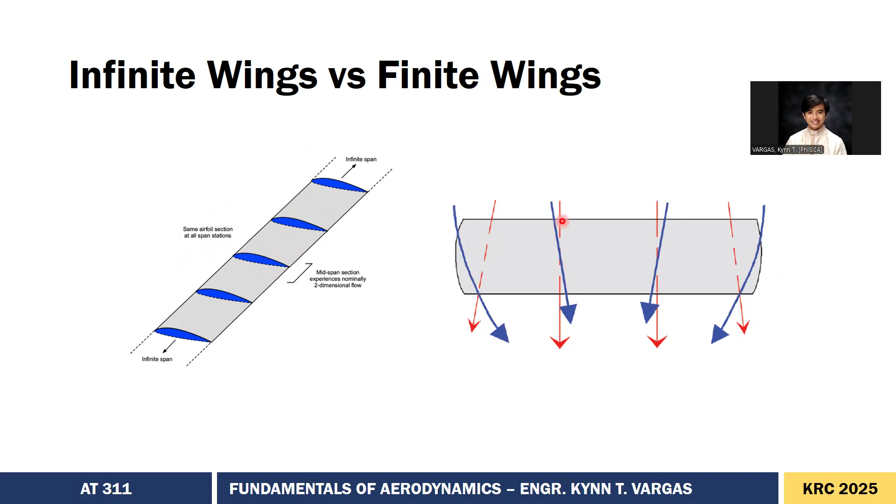So for infinite wings, this is what I mentioned earlier. It covers the end-to-end of the wind tunnel test section and varies in the x and y direction only, unlike finite wings where we have to consider the wingspan.

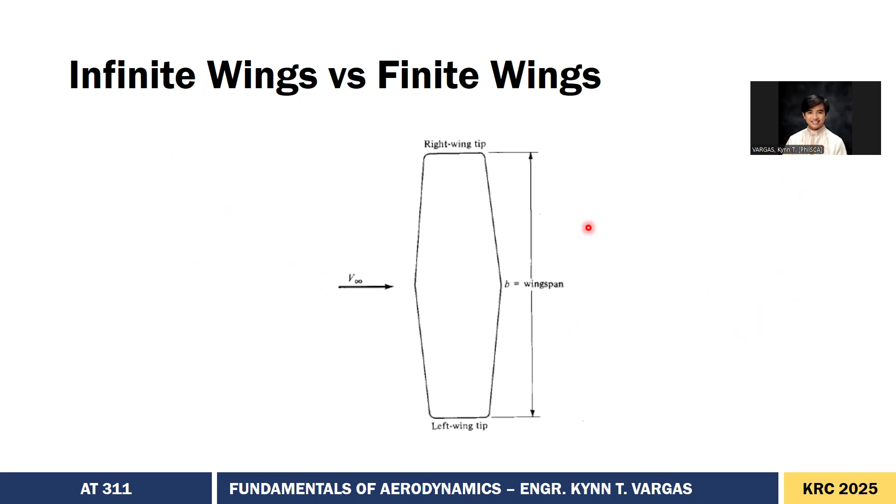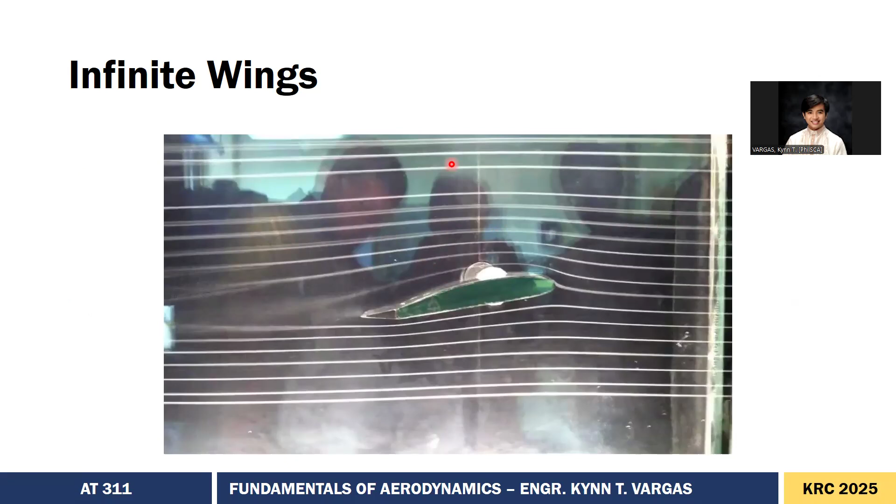So for infinite wings, what we'll use is this example. Like in wind tunnels, what we can see or visualize is only two dimensions, going in the x direction and the y direction. For z, it's not observable, because we don't have the ends of our wing.

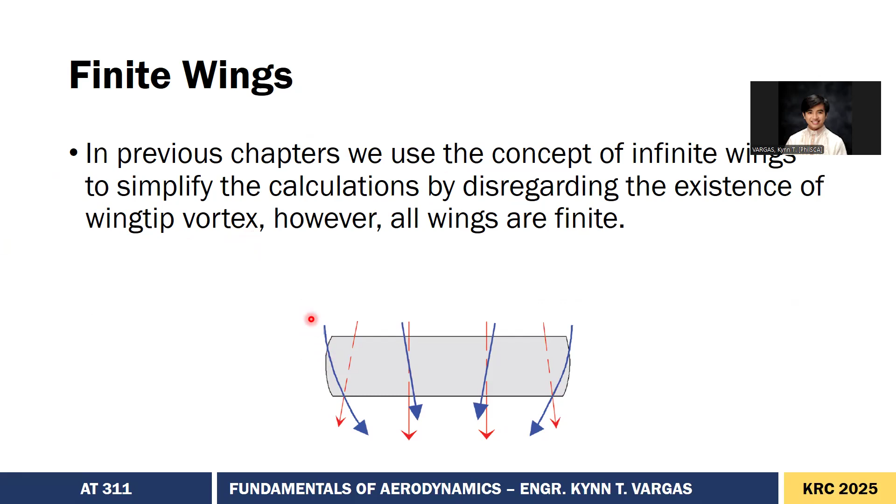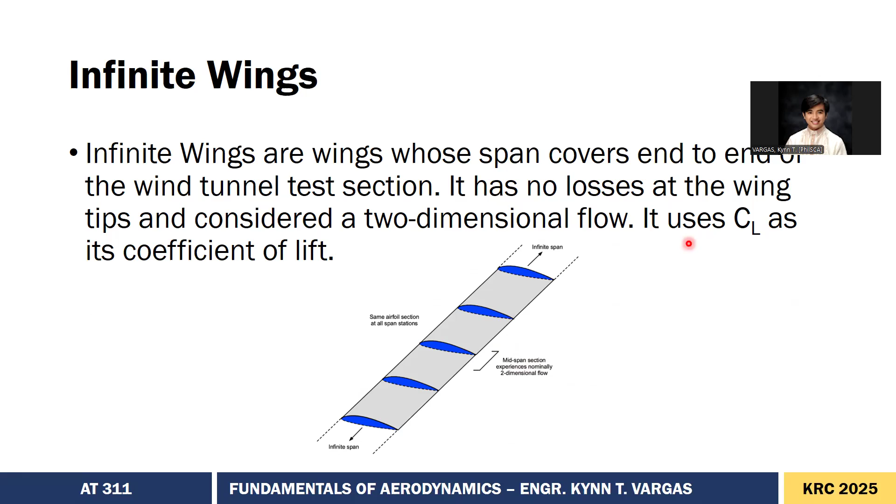Finite wings are what we see in actual aircraft, where the wingspan is B, this entire length, and this is chord C. Correction: since it's not indicated here, the CL should be lowercase for the airfoil, while for the finite wing it's capital CL, since this represents the lift of the whole wing.

The other one earlier was just the airfoil. So what are wingtip vortices? That's what we call the vortex which forms from the lower surface at the base of the wing towards the wingtip and back to the upper surface.

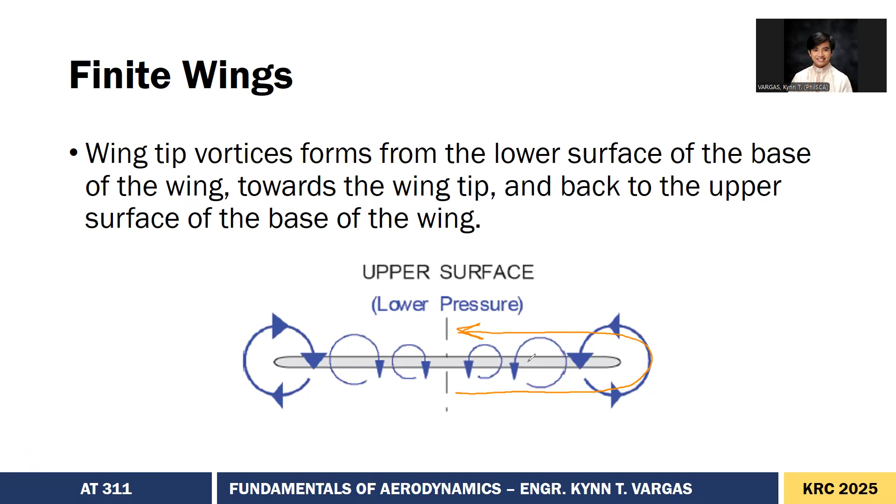This is the high pressure region, and this is the lower pressure region. The tendency of pressurized vessels, or even pressure alone, is that it wants to move from the high pressure region to the low pressure region.

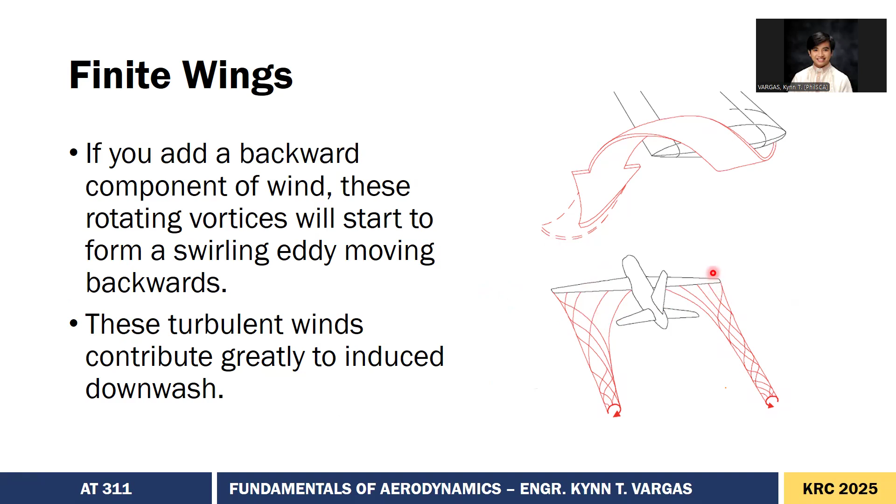So now it has circular motion which trails downstream from the wing called vortex. As seen from the trailing edge, all of that exists across the whole span. It spins like that. The strongest effect of the induced vortex is near the wingtips because that's where more circulation occurs, so it contributes to downwash.

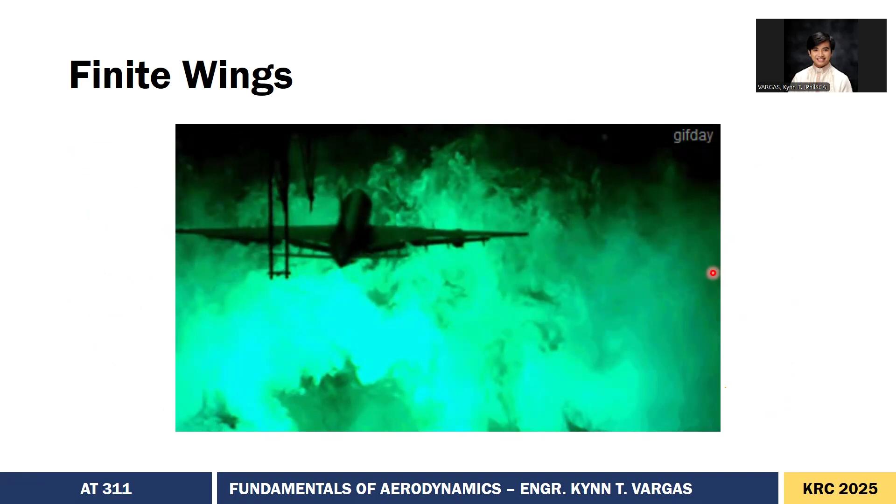So for the induced downwash, the wingtip vortex in particular has a significant effect in several important areas of aerodynamics, stability, and control. It's not just that drag reduces power, no, it also makes it harder to control and to fly the aircraft.

So notice here, upwash is increased because it gets deflected upward. So the vertical velocities create vortices. More of it gets converted into downwash compared to upwash, resulting in an induced downwash.

If you notice, our relative airflow is straight, which is what we need. So your angle of attack, if we draw it, is straight, then this is the airfoil, it's large. Now if we have induced downwash, which is this dotted line...

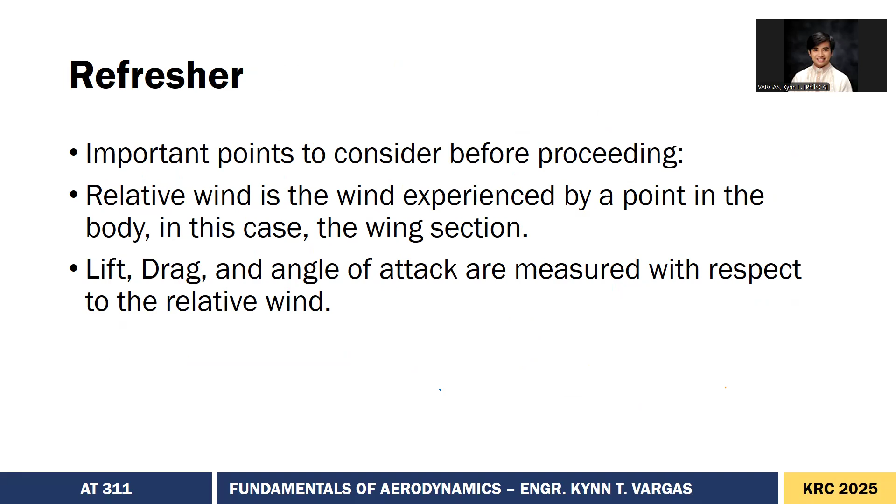So important points to consider: the relative wind is experienced by a point on the body, in this case the wing section, and the lift, drag, and angle of attack are measured with the relative wind. So remember these.

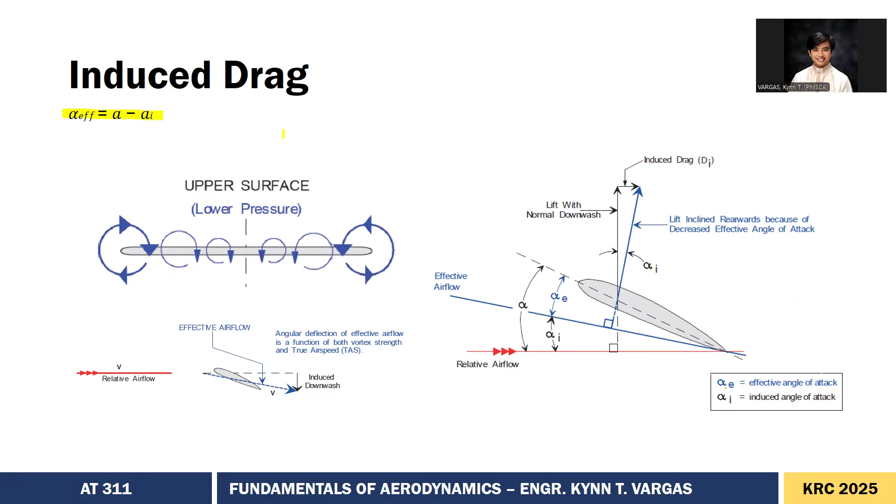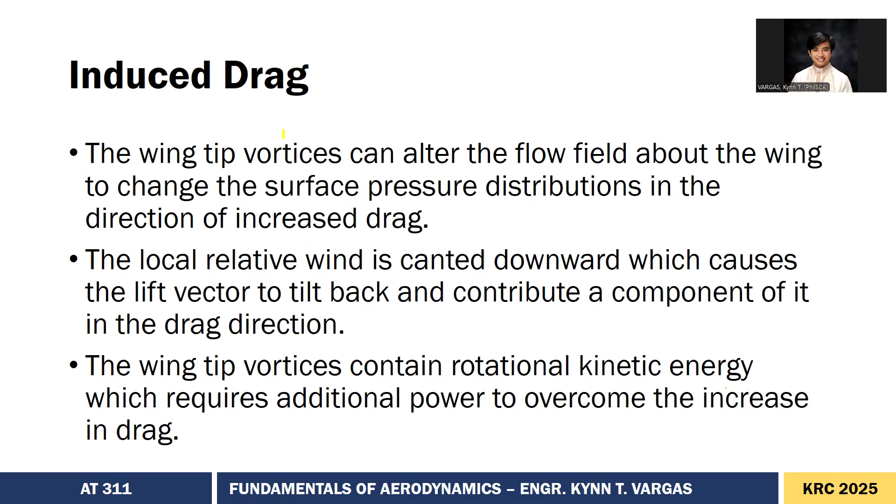So the wingtip vortices can alter the flow field about the wing to change the surface pressure distribution in the direction of increased drag. So the local relative wind is canted downward, which tilts the vector backward, contributing to a component of drag. And this rotational kinetic energy will require additional power to overcome the increase in drag. So more thrust is needed, we get additional requirements for power, which, when the aircraft is draggy, expect it to be expensive to operate. It's inefficient. So that's what's newly introduced to us.

Before, we only had parasite drag, which is an umbrella term for different types of drag: skin friction drag, roughness, form drag, shape. That's why there's profile drag. So profile drag is the combination of skin friction and form drag.

Then we have interference, which is a more complex type of drag. This is something encountered in future aerodynamics, most notably in engineering. So interference drag is simply drag that interferes.

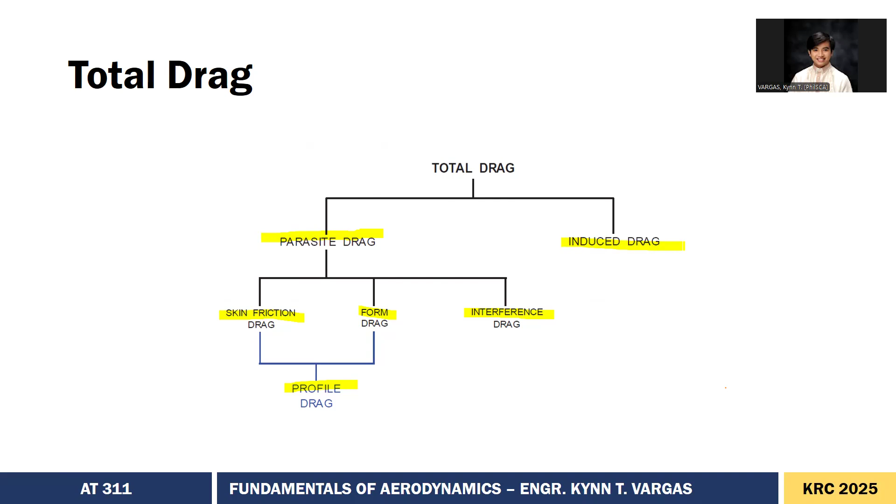Induced drag, this is the new one. Its longer name is lift-induced drag. It's a byproduct of lift, so as you increase lift, you also really get an increase in drag. So this is our formula. What we'll consider for now is just the profile drag, actually the profile drag is what we'll consider for parasite drag.

For simplification, let's go back here. Let's proceed directly to the profile. We won't consider interference for now. So CD0 is really the parasite drag. Now we have CD0 plus CDI, where CD0 is the combination of skin friction and the form or pressure drag, while CDI comes from the lift equation, for which you need this formula.

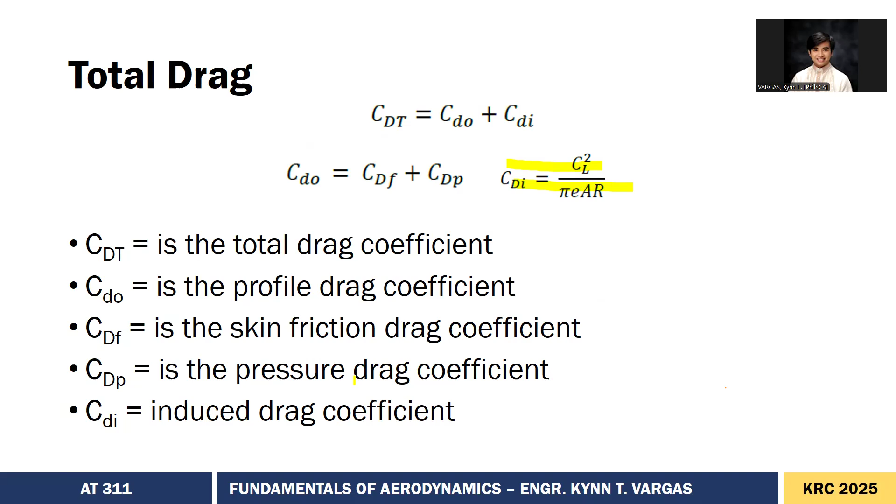CL squared over pi E AR - that's the formula for CDI. As we've discussed repeatedly, the drag polar or drag curve is U-shaped because induced drag decreases as you increase speed, while parasite drag increases as you increase speed.

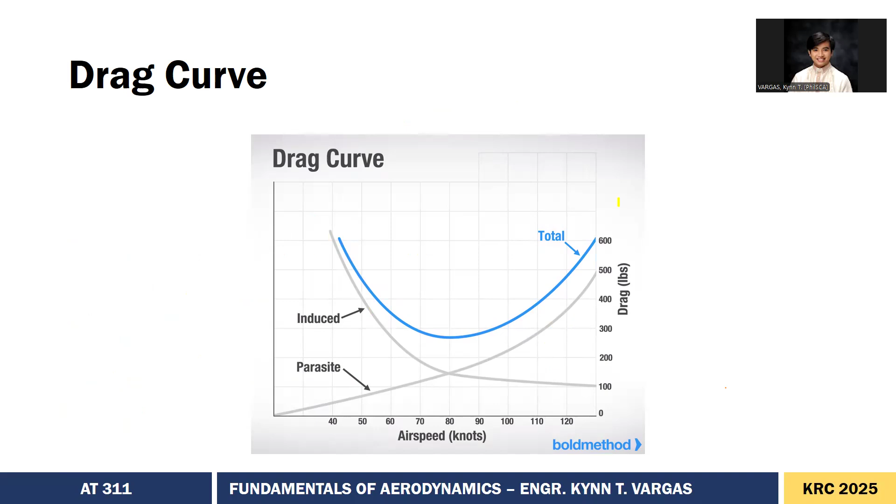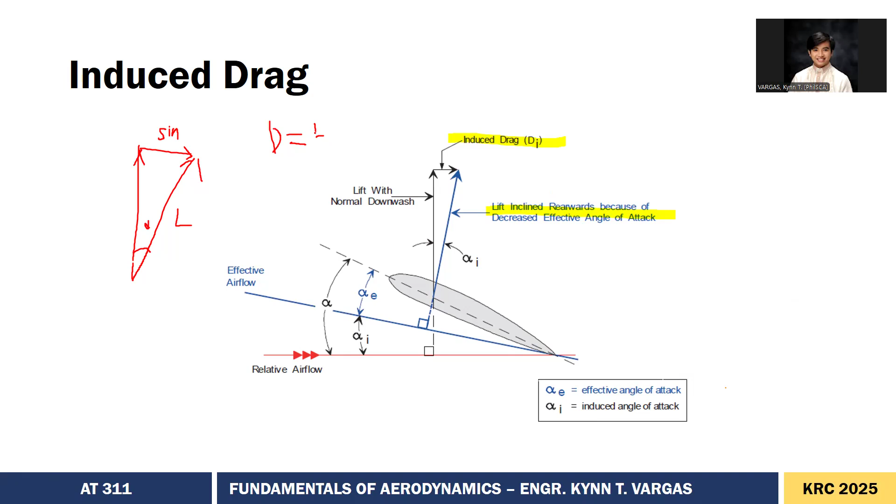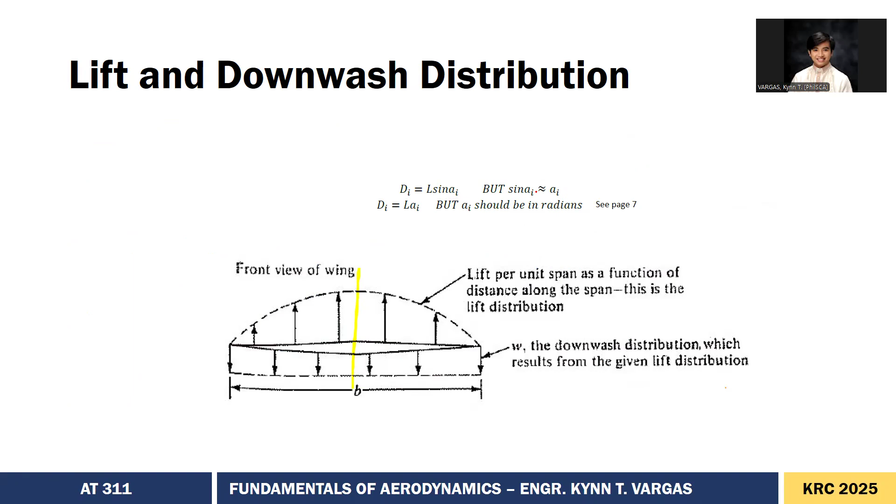Therefore this is the opposite side. So to get the opposite, we need sine. So D equals L sine alpha. Going back, the formula is L sine alpha, but sine alpha equals alpha in radians. So to simplify, it's just LAI, but in radians. Are we good there? D equals LAI.

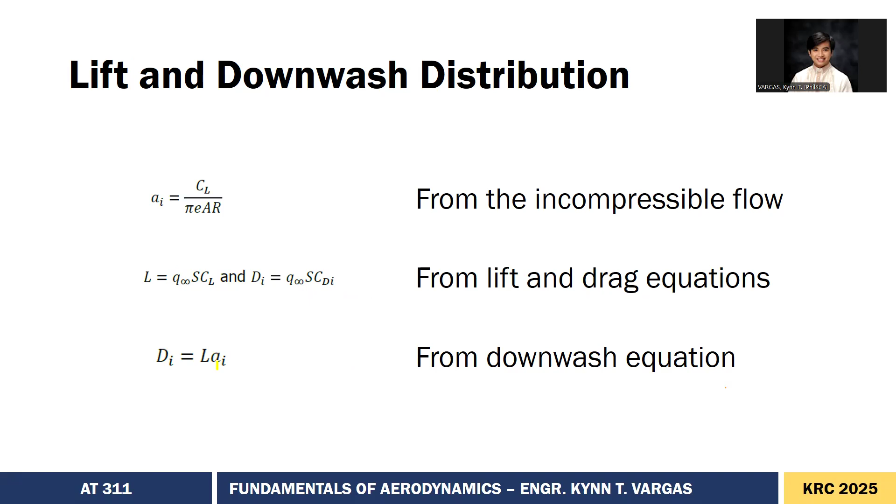Now I'll highlight the formulas later, but here's what we need to remember. AI equals CL over pi E AR for incompressible flow. Lift equals Q S CL. Drag equals Q S CDI for the lift and drag equations. And for downwash, DI equals LAI.

Now remember, this is just how we derive the formula for CDI shown earlier - it's highlighted here. It starts from the angle of attack: AI equals CL over pi E AR. Now we need the formula for lift, which is Q S CL, and DI, which is Q S CDI. So we can cancel Q and S from both sides of the equation, leaving us CDI equals CL times CL over pi E AR, which results in this equation.

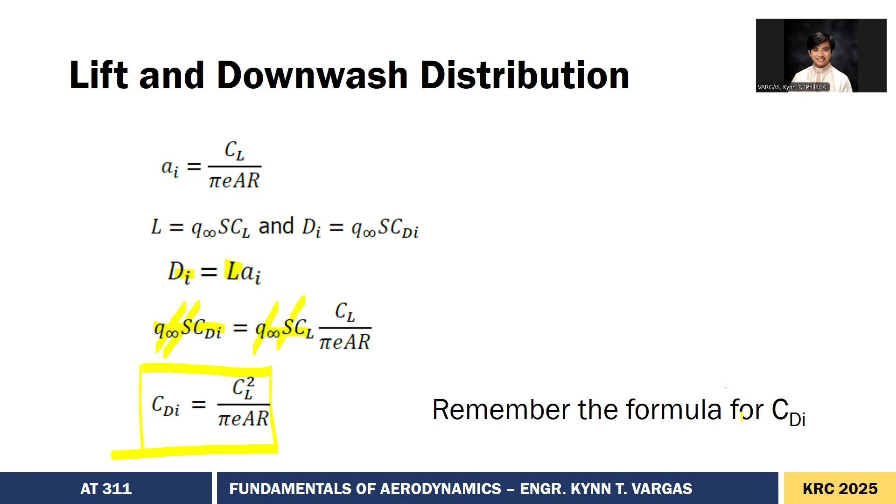Remember this. There's also a note on what to remember about the formula. Remember the formula for CDI: CDI equals CL squared over pi E AR. Now note, the letter E here is Oswald's efficiency factor - it's not the E on your calculator.

Remember that E is equivalent to 1 for elliptical wings. However, E becomes 0.8 for rectangular wings. It changes for others, but for most cases, 0.8 is what we use. As for AR, sometimes just A, that's called aspect ratio, which is simply the quotient between the span and the chord. So what does aspect ratio mean?

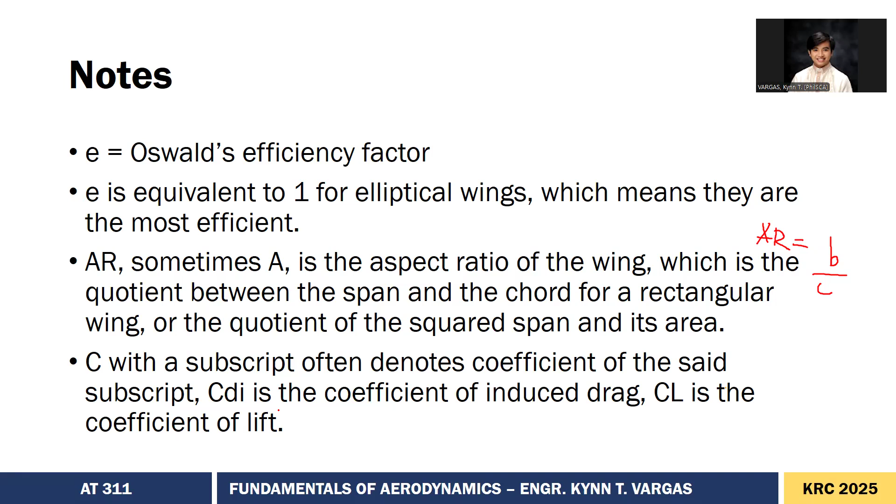It's just like with cellphones - the ratio between the span and the chord. So AR equals B over C. And the C is the coefficient of the said subscript - coefficient of induced drag, coefficient of lift. That's a lot. So can you handle this?

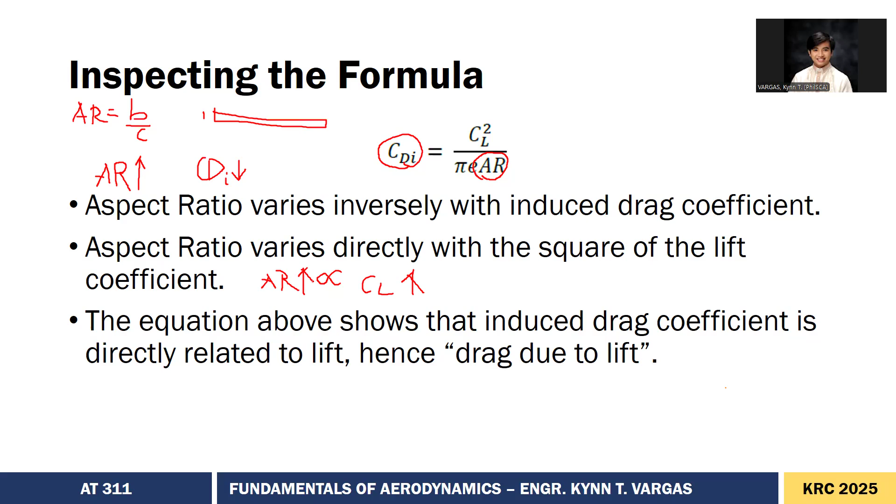Ngayon, the equation above shows that the induced drag coefficient is directly related to lift. Hence, it is called drag due to lift.

So, ito yung formula for aspect ratio. It's either AR, aspect ratio, equals B over C, or pwede din namang B squared over S, where ang B is wingspan squared. Tapos yung S ay surface area ng wing. So, yan yung either of the two formulas na pwede mong gamitin. Proof lang na equal to kapag rectangular, so yung S is equal to B over C, B times C. So, pag na-cancel to, may iwan B over C.

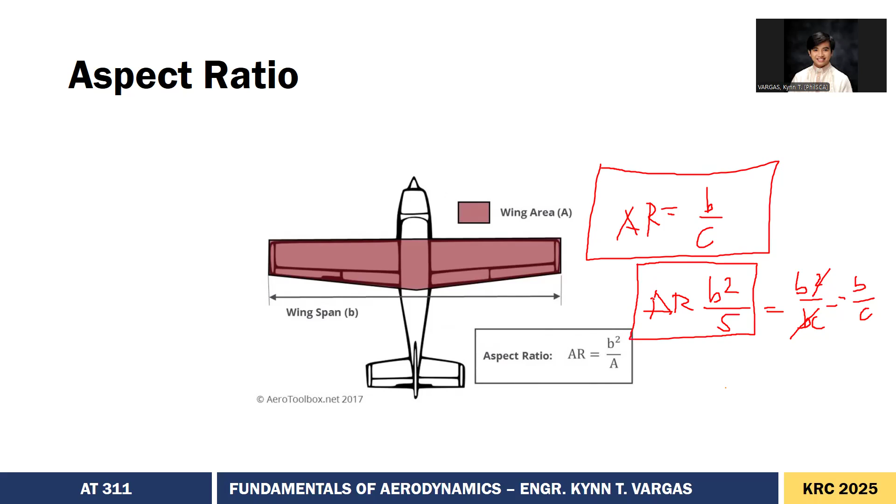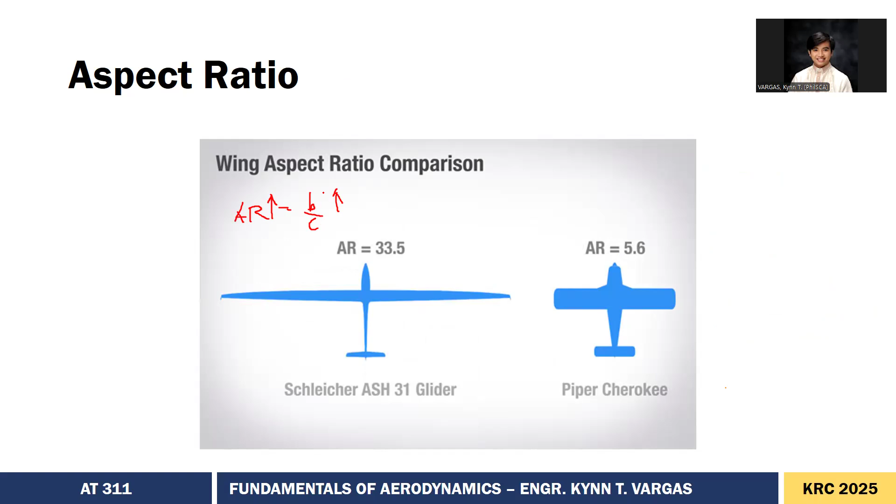So, tandaan, itong formula na to ay for rectangle only. Tapos itong aspect ratio na to ay ginagamit for lahat ng any other shapes. Nakuha? So, ito yung sinasabi ko kanina. The longer the aspect ratio, the higher the aspect ratio, ibig sabihin, mas malaki si wingspan. Kaya yung mga glider natin, mahaba yung wingspan dahil malaki ang aspect ratio, mataas yung lift. Unlike sa mga fighter jets. So, ito lang ulit yung formula, pinakita lang ulit for aspect ratio.

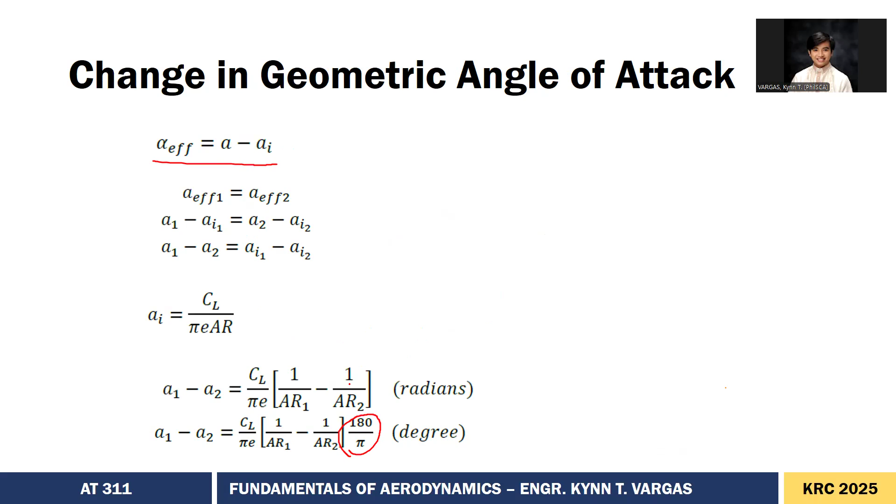Ngayon, as you increase in aspect ratio up to infinity, so sobrang haba ng wingspan mo, ano nangyayari? Yung angle of attack mo, mas maliit. Kaya nga yung mga gliders, hindi yun pwedeng magbiglang angle of attack, so karamihan nun nakapantay lang. Pero yung CL nila sobrang laki, so makakapag-lift agad kahit mabagal lang yung lipad.

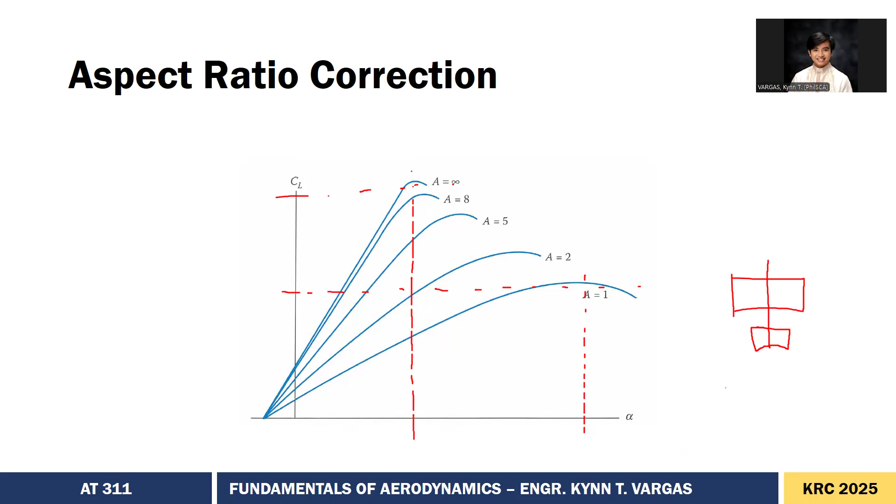So eto lang yung mga nasabi na din kanina, kaya nyo nang basahin na, explain na din naman kanina to.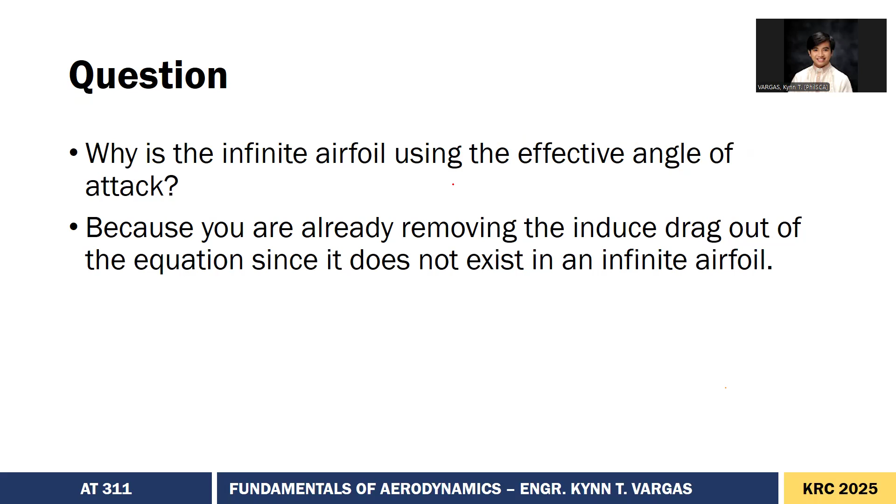So eto din. Now question: why is the infinite airfoil using the effective angle of attack? Kasi tinanggal mo na yung induced drag dun sa equation kasi wala siyang ganun sa infinite airfoil.

O, nakakuha yan? So for aspect ratio corrections, ito na lang din yung process. Para saan yung aspect ratio correction? Infinite wings kasi ginagamit natin mga formulas. But if gusto nating makuha si finite wings, kailangan yung gamitin tong formula na tong nasa ilalim.

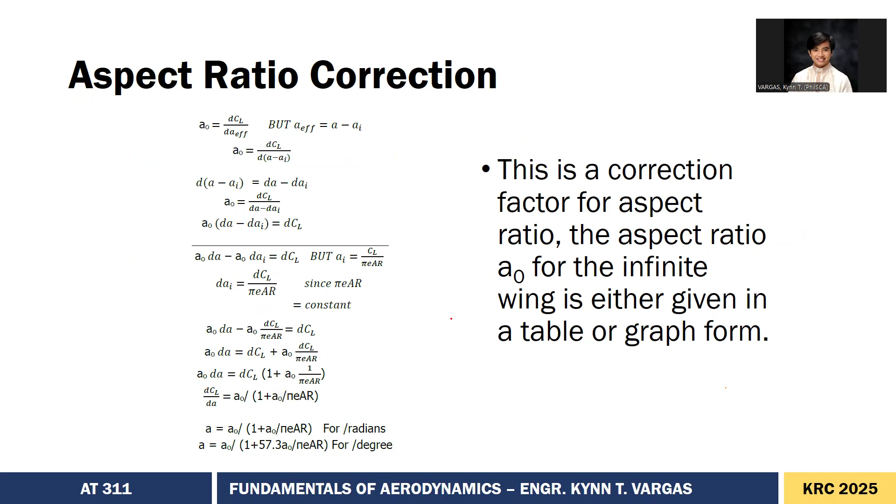So, ayun. Medyo laban pa ba? Dito naman tayo sa effects sa wing profiles. So, sa spanwise flow naman tayo.

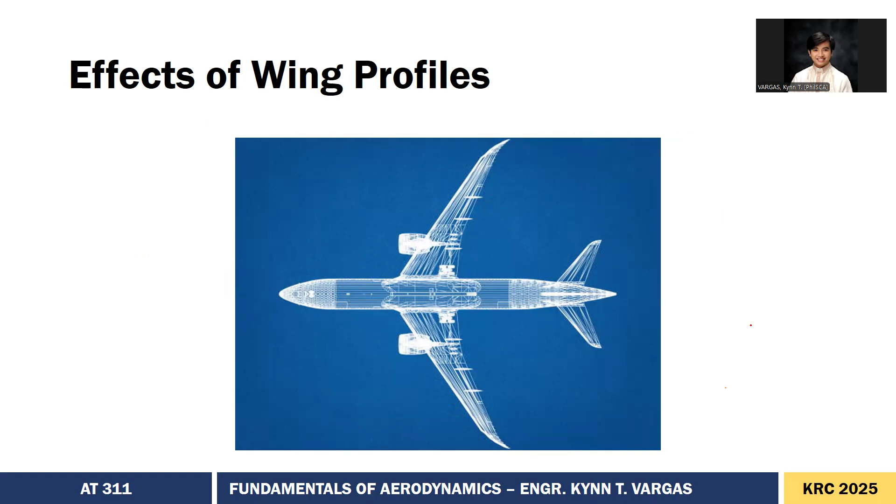Ever wonder why naka-swept wing yan? And tapered na to. So, ito kasi yung nangyayari. So, ito yung actual wind na lumilipad over the body. Ito yung tinatawag nating relative wind blowing over the wing.

And now, meron kasing dalawang component yan madi-divide. So first is yung normal to the surface, which is yung chordwise component, and yung parallel, which is yung spanwise. Yung spanwise, kung napapansin nyo, saan siya papunta? Papunta siya sa wingtips. Ito yung natatapon. Ito yung nagiging vortices. Ano yung kulay blue? Yung kulay blue, yan yung with respect to 90 degrees normal, siya yung effective lang na magpe-create ng lift.

So anong meron dyan? Yung swept wing ay dinedesign natin para hindi agad tayo mag-reach ng sonic speeds. So what's that for? Tumatakbo na talaga yung aircraft mo at speed of sound pero yung nararamdaman ng wings mo, let's say nasa 0.8 pa lang, sa transonic region pa lang. Hindi pa siya nag-i-stall. While you are flying at Mach 1, wala ka pang ganong formation sa iyong wings.

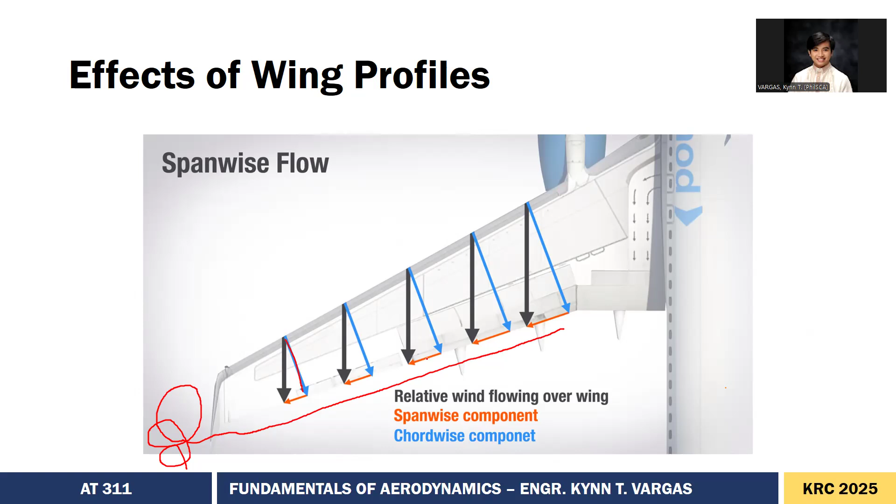So, eto yon. Kung napapansin, for a rectangular wing, nakapantay lang to. Pero for the swept wing, syempre dun siya sa chordwise.

So, ano nangyari? Kung mapapansin mo, yung MCR nito ay 0.7. Pero kapag swept wing, let's say ang swept mo ay 30 degrees, pag kinompute mo siya, 0.808. So bago ka mag-critical angle of mag-critical Mach, yung wings mo ay naka-design 0.7 lang, pero you can exceed up to 0.8 because of that geometry.

Yung iba kasing speeds ay tinatapon lang niya. While you are effectively gaining drag, it's not a bad thing na meron kang makukuhang mas mataas na M-crit. Trade-off talaga siya. So, wala kang makukuhang perfect system. You need to sacrifice. In this essence, nagsasacrifice sila ng additional fuel because of the additional drag, pero you can go at a much faster speed. Time. Time yung nakukuha na lang kapalit.

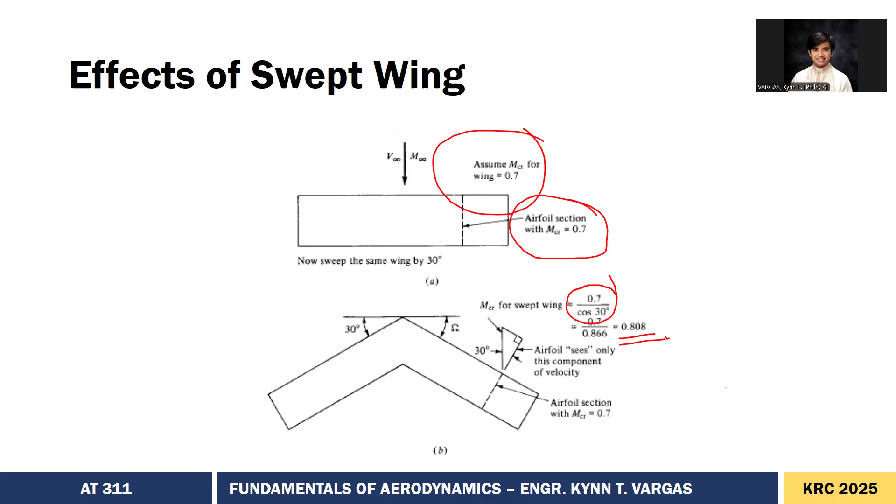Kaya yun yung nasa transonic aircrafts, yun nasa commercial aircrafts natin. You can fly higher, fly faster without that much penalty in the supersonic, sonic flows. So, ito lang is para mas malinis na drawing sa nakita. And, ginagamit din yung sweep for supersonic flight for the reduction naman ng wave drag.

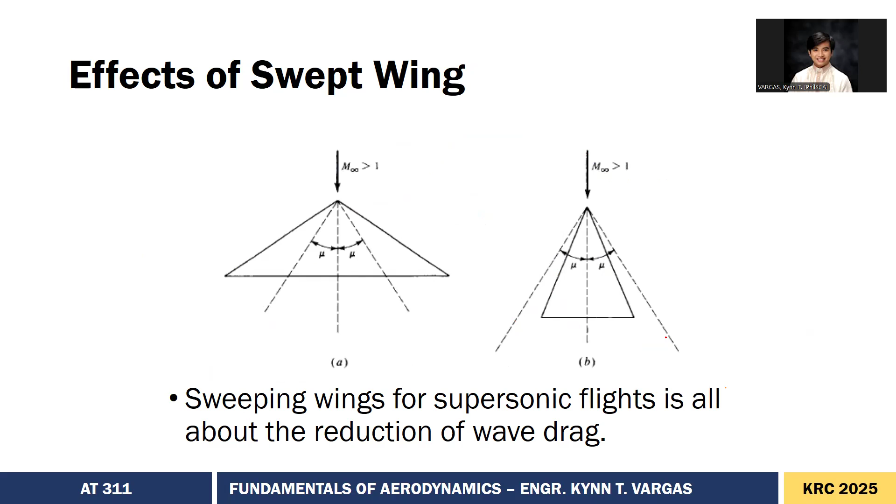So, ano yung effects ng swept wing? It increased wing weight. Bakit? Marami ka kasing structural members na ilalagay para masuportahan mo yung napakanipis na dulo. Next, reduces lift due to slower local airflow. Wala tayong magagawa. Babawasan niya talaga yung lift para lang maalaw na mas mabilis yung lipad mo.

Higher velocity. Now, CG shift when fuels are consumed. This is a more advanced topic, but CG is center of gravity. So dahil alam niyo naman na ang wings ay container din siya, or yan yung lalagyan ng fuel natin. So ano nangyayari? Pag nagastos mo yun nasa dulo, yun ang unang ginagamit, yung bigat, nararamdaman na lang sa unahan. So pag nagbago yung CG, nagbabago din yung behavior ng aircraft mo in stability.

So next, aileron and flaps reduction in efficiency in low speeds. Bakit? Same lang din sa iba kasi yung chordwise and yung spanwise flow niya. Next, reduces the adverse effect of transonic, which is good na, and supersonic flow, delays the onset of shockwave, and experiences lower air speeds. Bakit ganyan engineer?

Pag susumahin, parang mas maraming sayang. Mas maraming, alam mo yun, mas maraming trade-off na nabawas. Karamihan dyan ay tungkol sa lift. Ang lift ay kailangan natin para lumipad.

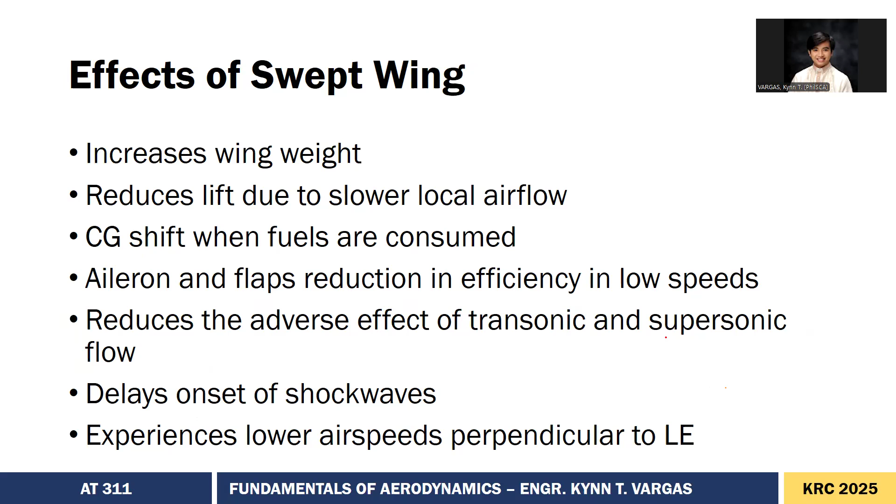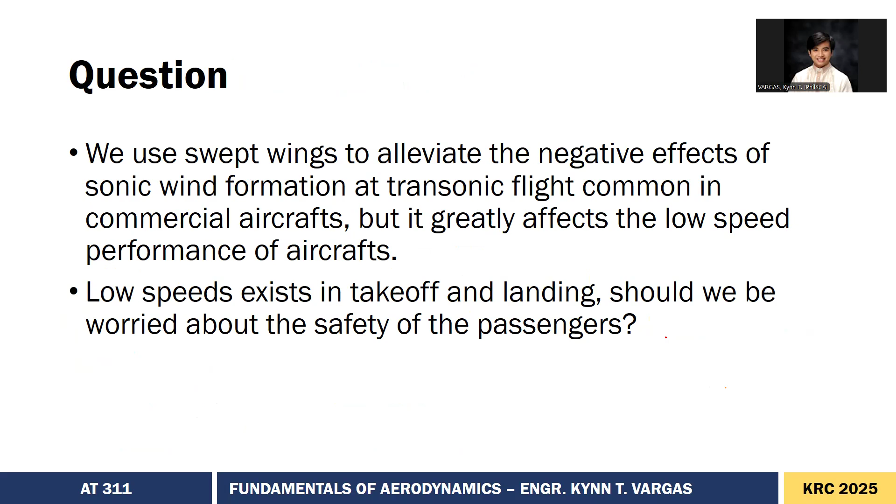So, kung yung swept wings ay ginagamit natin to alleviate the negative effects of sonic wind formation, ah, yung low speed ay delikado kasi yun yung nasa takeoff and landing. So, hindi ba dapat tayo mag-alala na ang baba ng CL mo during low speed operation, which is takeoff and landing? Isa sa pinaka-critical. So, anong gagawin natin?

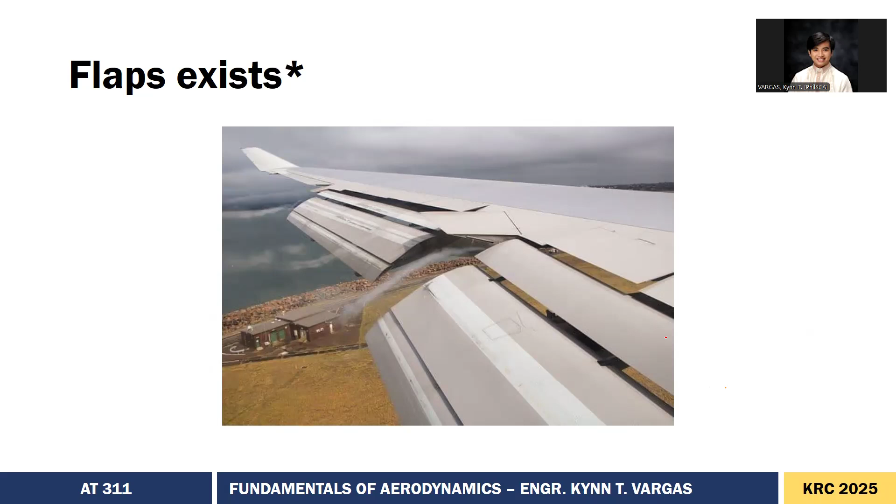Meron tayong flaps, which yun yung magiging topic natin in the next discussion, because flaps are high lift devices. So, okay lang tayong mag-sacrifice ng onting lift, kasi pwede naman natin siyang ma-recover. Pero yung critical Mach number, medyo mahirap makuha yan, aside from swept wings. So, yun lang.

Balik tayo sa practice problems. But, kaya nyo na to? Same lang din to ng mga nauna. Simple lang na solving to. Then, thank you.